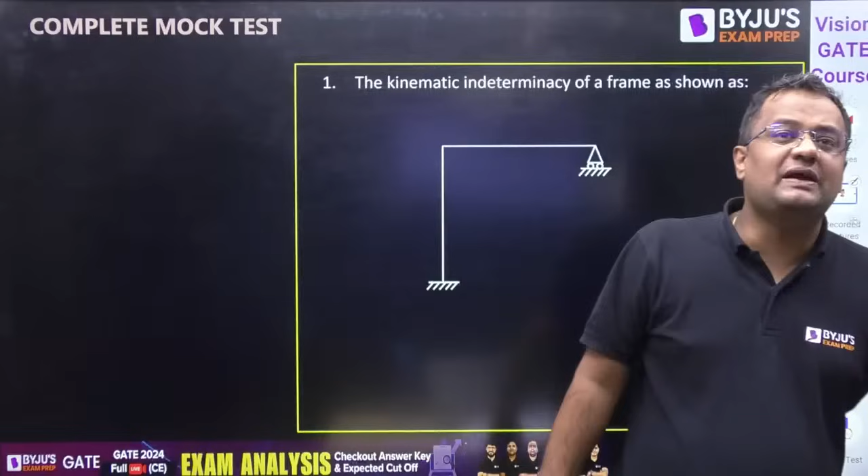Okay come on, we are moving. And guys, for MSQ questions there is no negative marking. For MSQ questions there is no negative marking. MSQ and NAT both have no negative marking.

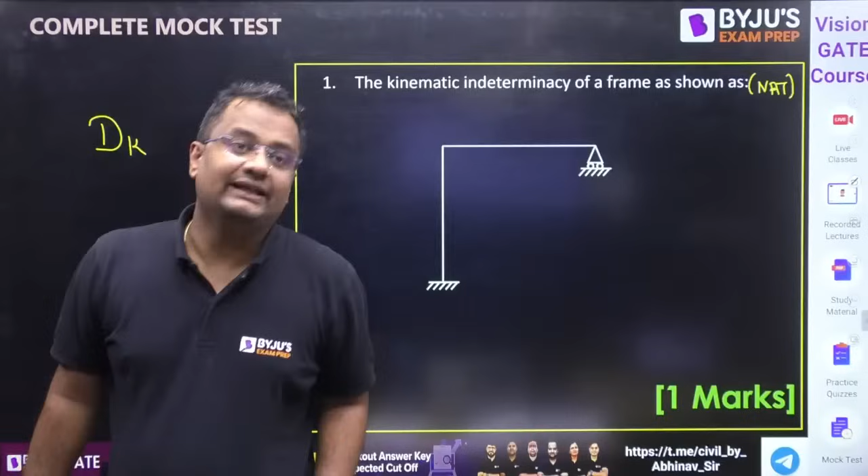NAT means that when you are evaluating yourself in the GATE examination, it will be written whether the question is MCQ, MSQ or NAT. It will be written there, guys. So, what is the degree of kinematic indeterminacy?

Good morning Sagata, everyone. The degree of kinematic indeterminacy is 3J minus M minus R. What is the number of joints? 1, 2, 3. Number of members, guys. Number of reactions: 1 and 2, 1 vertical 1 horizontal, reaction 3 and 1. Total 4 reactions.

So what value are we getting? 3J is 9 minus 6, it will be 3. So for this NAT type problem you have to fill in 3. And what are those 3? If you want to visualize it, why are you writing 2, guys?

If you want to visualize it, when the load will be there, let it be point B, let it be C. What are those 3? One is this movement theta B. When this C will be going here - small deformation, not rigid body displacement - and this is theta C. These 3 are the things that will be changing. Yes or no, guys?

Come on, tell me quickly. Okay, question number 1, guys, please evaluate yourself. Question number 2, again of 1 mark.

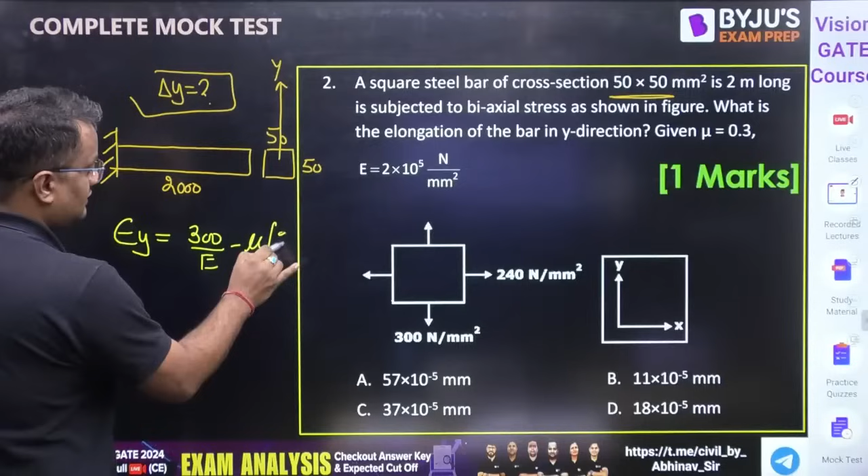What is the elongation of the bar in the Y direction? What is strain Y? Strain in Y is sigma Y by E, that is 300 by E, minus mu times sigma X by E, that is 240 by E. Now E value and mu value are given, so strain in Y can be found since E and mu are known. Strain Y equals delta Y by Y, and Y is 50. From here you can get the value of delta Y.

Are you getting this answer A? If yes, please do +1 marks, evaluate yourself as plus 1 marks, otherwise minus 1 by 3, because this is MCQ, so of course negative marking will also be there.

Come on, Mayank from Madhya Pradesh. Question number 3. Please bring the calculator, copy and rough pen with you if you want to take the real feel of this paper.

Let there be a rod placed between two metal plates. The metal plates are fixed supports. The rod is fixed to one plate, and the distance between the rod and the other plate is 0.1 mm.

The temperature of the rod is increased by 120 degrees Celsius. The length of the rod is 300 mm. Young's modulus E is given and alpha is also given. Calculate the axial stress produced in the rod.

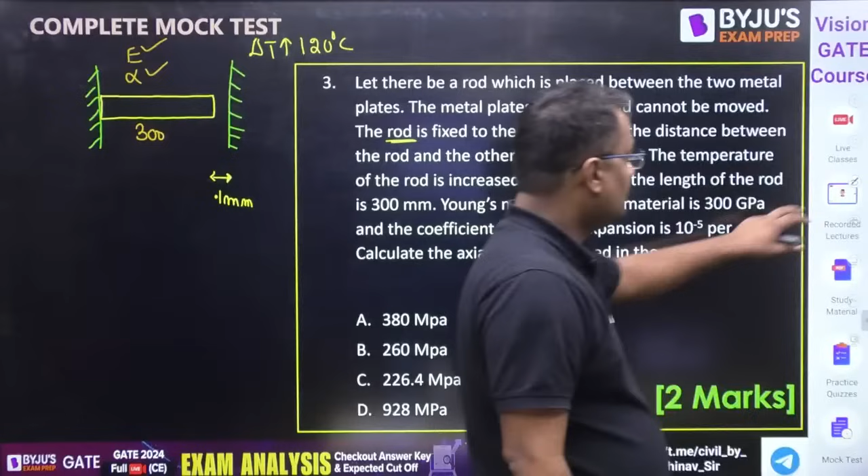First, let me check what will be the free expansion if these supports are not there. Free expansion is equal to L alpha delta T. L is 300 mm, alpha is 10 to the power minus 5, and delta T is 100 degrees. So 300 into that is 3 into 10 to the power 4, which gives 0.3.

So if it is free, with no restriction, it will elongate by 0.3 mm on both sides - I am just showing one side. But here it can elongate only 0.1 mm, so there will be stress.

If this value is 0.05 mm, tell me the answer on the comment box - what will be the stress? It wants to expand 0.05 and there is a gap of 0.1, so it can easily expand 0.05. So there will be no stress in that case.

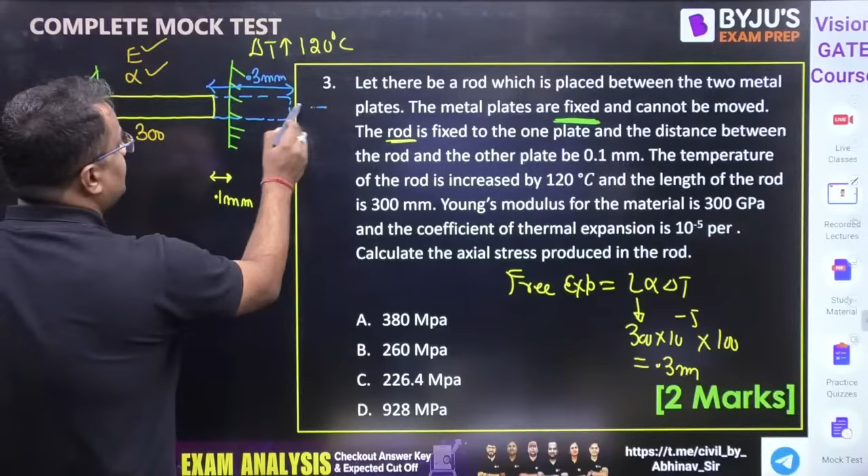So here stress will be coming. This internal force P will be pushing it back by how much? 0.3 minus 0.1, so this is 0.2. So P is pushing it back, PL by AE is equal to 0.2, so from here P by A is the stress. L value is given, E value is given, you can find the value of stress.

Or this is one method. Second method: stress by strain prevented, in case of thermal stress, is Young's modulus. So what is strain prevented? Strain prevented is 0.2 upon length, that is 300. So from here also you can find stress.

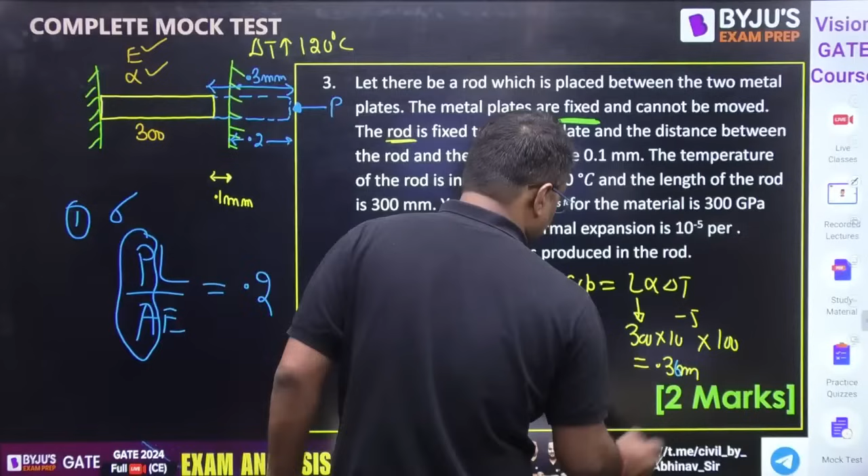Free expansion is coming how much? T is 120. So 1.2 into 0.3 gives 0.36. So this is 0.36 minus 0.1, which is 0.26.

So how much answer are you getting, guys? Come on. Option B - everyone got it? Evaluate yourself, I will be asking your marks also.

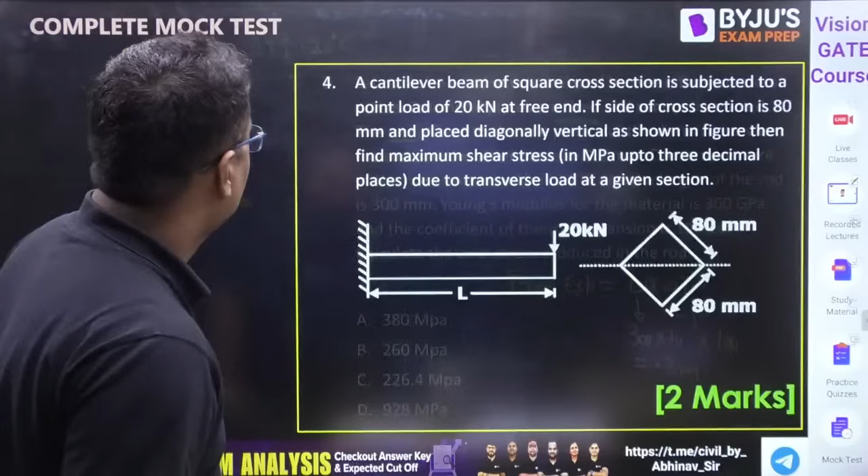Question number 4, guys. A cantilever beam of square section is subjected to a point load of 20 kilonewton at the free end. Here the load is 20 kilonewton. If the side of the cross section is 80 mm, it is placed tilted like this.

Then the maximum shear stress is asked. This is a 2-mark NAT type question, therefore no negative marking.

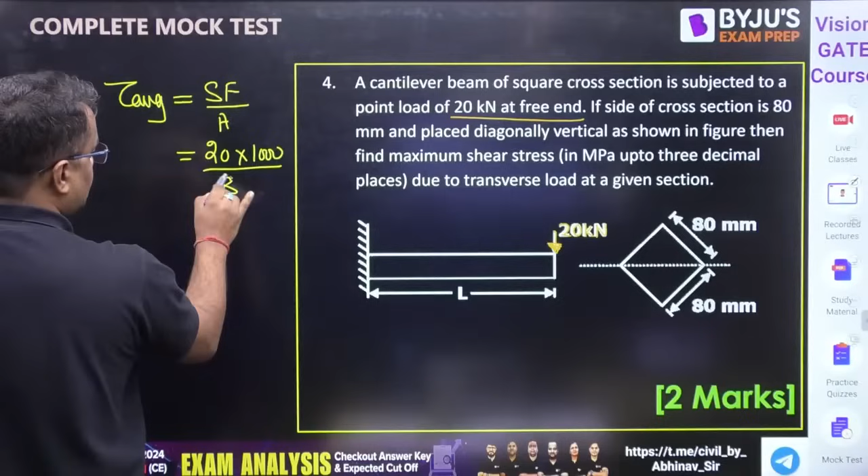Guys, what is tau average? Tau average is shear force by area. So Newton per mm square is megapascal only. Let me convert it to Newton per mm square, which is also megapascal.

And for this kind of diamond section, what is tau max? If total this is h, tau max is 9 by 8 of tau average, or also 1.125, since 9 by 8 is 1.125, acting at 3h by 8 from here. So what is 9 by 8 of tau average?

So this is coming to be 3.125. Tau maximum in diamond section is 9 by 8, or you can say 1.125 of tau average. So it will be 3.515 megapascal.

This is the answer, guys. This is the answer. Question number 4. Yes, Deepak, Saurabh, all champions are here, guys. Come on, everyone.

Question number 5, guys. This is also shaded, beautiful question, guys. This is the question for the rankers, everyone.

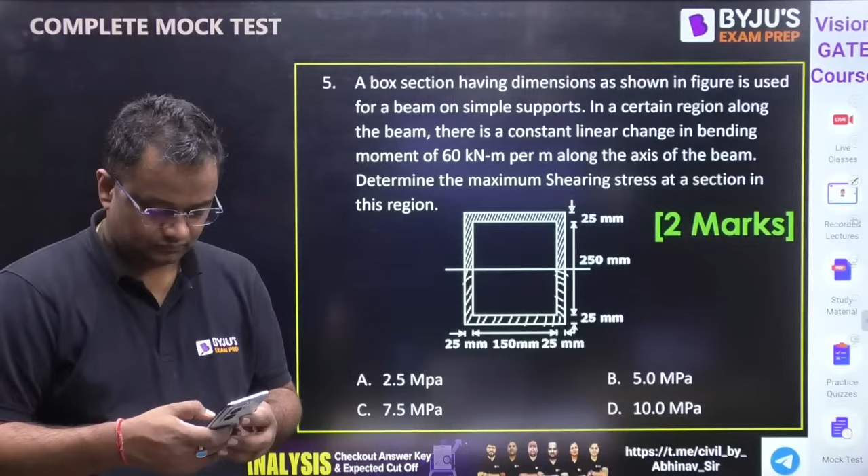Chalo. This is the question for the rankers, guys. Let me see who can do this, guys.

What is this box cross section having dimension as shown in the figure? In a certain region along the beam, there is a constant linear change in the bending moment of 60 kilonewton meter per meter. Okay, what is shear force, guys?

Shear force is dm by dx. So what is the change in bending moment? 60 kilonewton in 1 meter. So it is 60 kilonewton shear force.

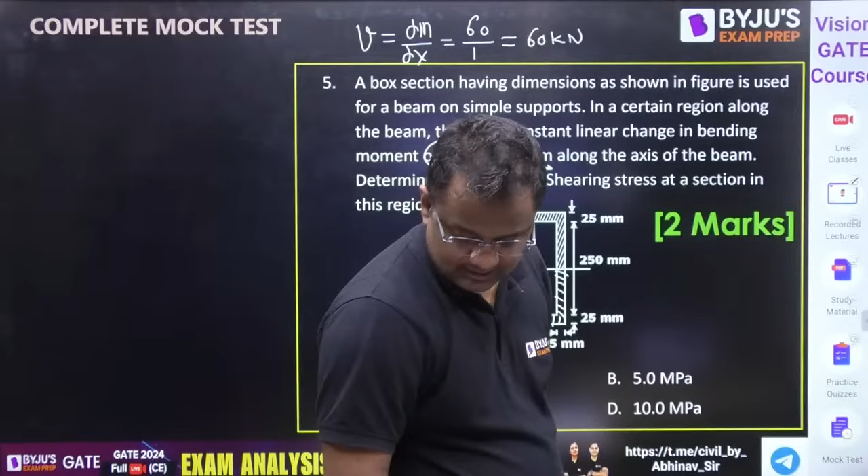Determine the maximum shear stress, guys. Excellent question. Excellent, guys. Everyone.

Chalo. Let me see who can do this, guys. This is the real question for the ranker student, guys. This is the real question for the rankers.

Guys, tau max will be at neutral axis for symmetric sections. Okay, tau max will be at neutral axis. Correct? Now we have to calculate.

This is not a rectangular section, guys. We cannot do 3 by 2. This is not a rectangular section. This is inside, it is hollow. And for symmetric sections, guys, either circular or rectangular, tau max is at neutral axis.

Now the tau maximum is equal to tau at neutral axis, which is equal to S into AY bar by I into B. Correct? Beautiful question, guys. Excellent question. Now what will be I?

What will be I? Now first of all I consider this whole is the area. Material is same, guys, BD cube by 12. So 150 and 25 and 25 is 200. 250, 25 and 25 is 300 cube by 12 minus.

Actually this is not the area. So what is B of this? 150 and 250. So 150 into 250 cube by 12.

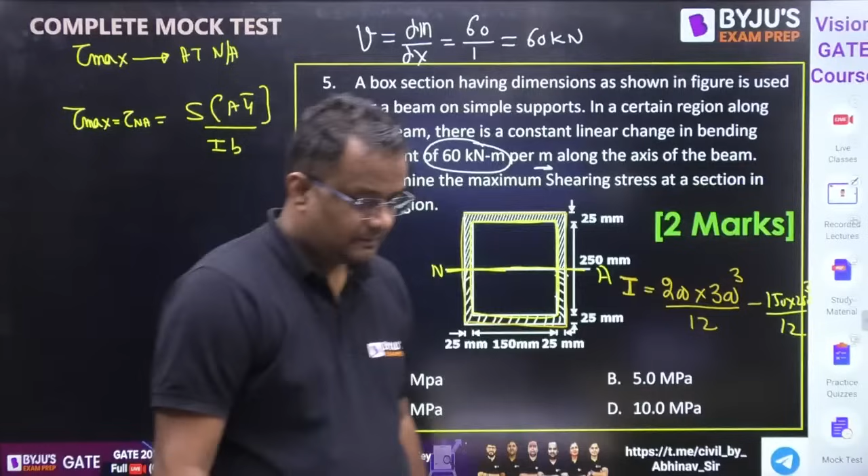Correct? So I about neutral axis from here, how much you are getting, guys? 25.46 into 10 to the power minus 5, in meter, not millimeter.

Meter to the power 4. Any doubt in this? Yes, 25.46. Good, Vishnu. Vishnu comments a lot, you know. Good, Vishnu. Did you like yesterday's session?

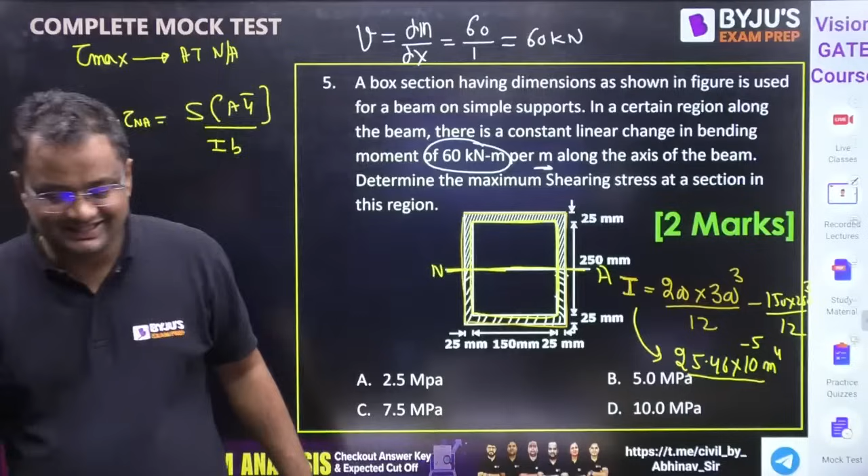Okay, now I is known. This I is known. What is the width? What is B? I is known, na.

What is the width? Width is the section where we are finding the neutral axis, where we are finding the stress. So what is the width, guys? 25 and 25, so it is 50. Width is the section where we are finding the stress.

What is S? S is this, 60. S is 60 kilonewton, guys. Okay, so S is known, I is known, B is known.

Now I'm going to AY bar. So A is the area of the section and Y bar is the center of mass of that. So let me consider above this, guys, either this is the red area, or this blue area.

Now for red area, guys, AY bar, what is area of that? Red area is 150, 25, 25. It is 200 into 25 is the area.

And what is the Y bar from here? 125 plus 12.5. This is 125 and 12.5. This is 137.5.

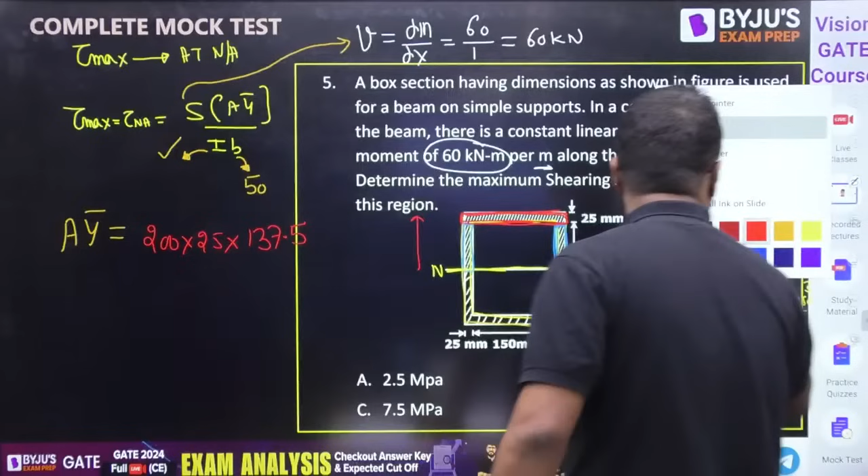Okay, this is for red. Now blue is also there. So what is this blue area? This is 25 and what is this length? 25 into 125, and there are two such, na? This and this. Correct.

Chalo. And what is the center of mass of this? 125 by 2. Center of mass is 125 by 2. So this is AY bar.

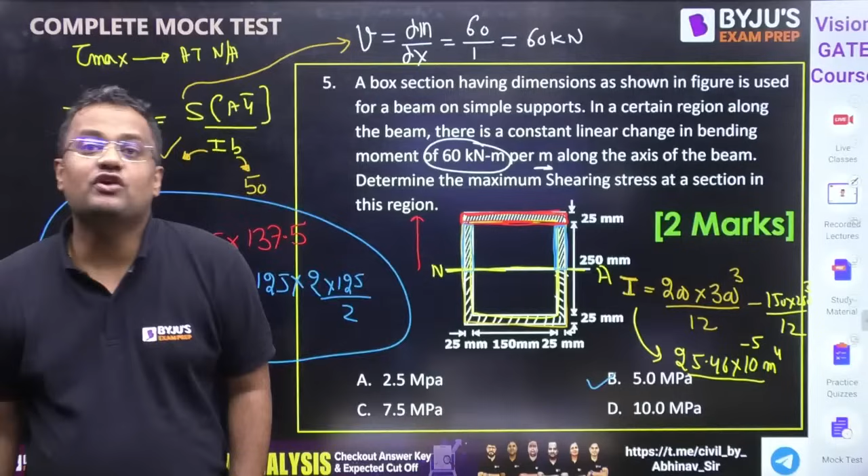Now if you put it, guys, you will be getting the answer, please check B. Have you understood, guys? This is the real question for the real students, guys. Have you understood?

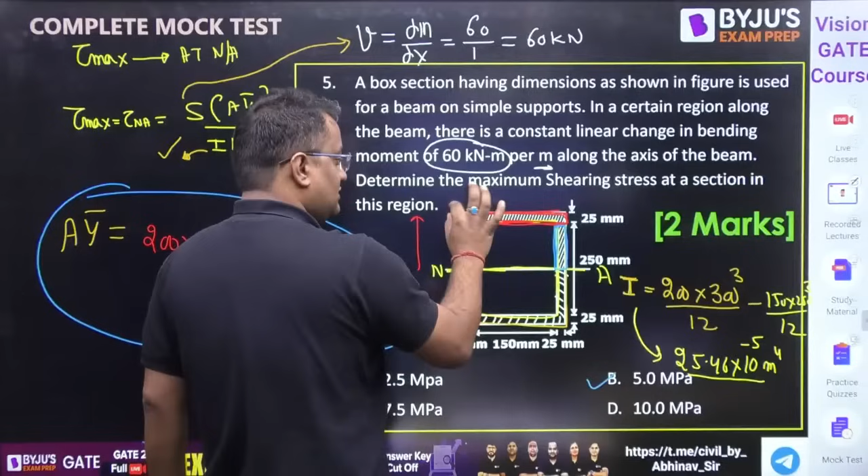For AY bar, above the area, I have separated the red area and the blue area. For the red area, I find AY bar. For the blue area, I find AY bar. This is the real question, guys.

2-mark question, question number 6. Chalo.

The rigid portal frame in the figure will not have a side sway if, okay guys, it is a symmetric section and symmetric loading - symmetric figure and symmetric loading, then there is no sway.

So guys, it will not have sway if I1 is equal to I3. If I1 is equal to I3, then it is a symmetric structure and the loading is also symmetrical. C option, okay guys.

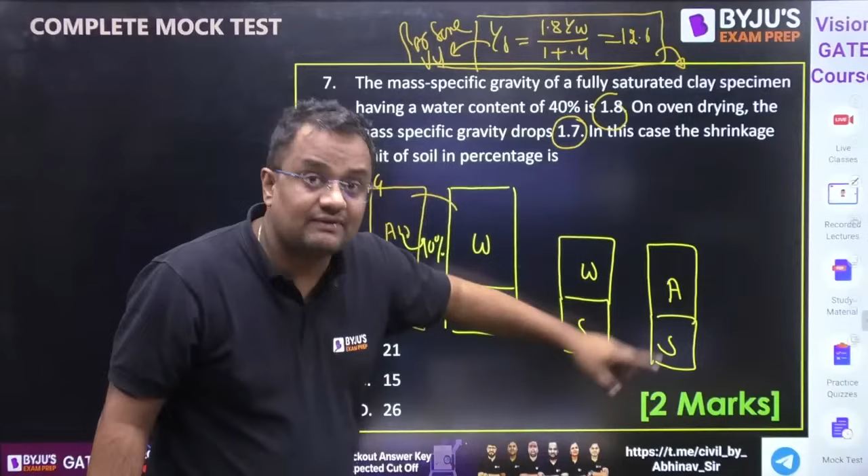The dry density corresponding to this state using this formula for same volume is 12 - 12 means density, it is around 1.2 specific gravity. But our specific gravity is 1.7, that means our specific gravity is increasing, which means volume is decreasing. Have you understood what I want to say?

Have you understood what I want to say? Okay, therefore I know it is decreasing.

Now if I apply here SE equals WG. So what is S here? S is 1, E I don't know. W is 0.4 into G. So E is equal to 0.4G. Yes or no? Now E is equal to 0.4G and the formula is gamma equals G plus SE over 1 plus E into gamma W.

What is gamma here? 1.8 times gamma W. That I am writing for this case. G plus SE, S is 1, over 1 plus E into gamma W. So guys, one equation is this between G and E, and one equation is this. From 1 and 2, you can find out the value of E and G.

So that G value you will be getting as 2.65. Please confirm, everybody, the G value is coming same.

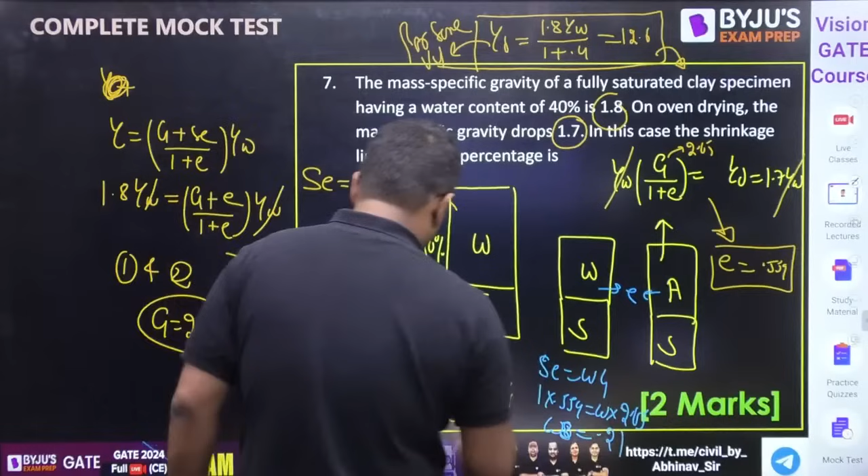Saturation is 1, E is 0.559, W into G, G is also same 2.65. So from here, guys, the W value you are getting is 0.2108, 21%. Beautiful question, guys. Beautiful question.

Have you understood? Any doubt, guys? Any doubt you can ask me. No doubt?

Okay, now this question, guys. What is the shrinkage ratio? 1 mark question. Shrinkage ratio is volume at liquid limit, volume at shrinkage limit upon volume at shrinkage, like this. What is the value coming? Guys, please check, if you put all these values that are given, you will be getting 1.9.

No, Akhil. If anybody has applied for 2 and he writes only 1 paper, it's okay. It's absolutely fine, guys. No issues in that.

Okay, 9. Do the question. Question number 9, hit it, guys. Okay, guys, how much is the gravel percentage?

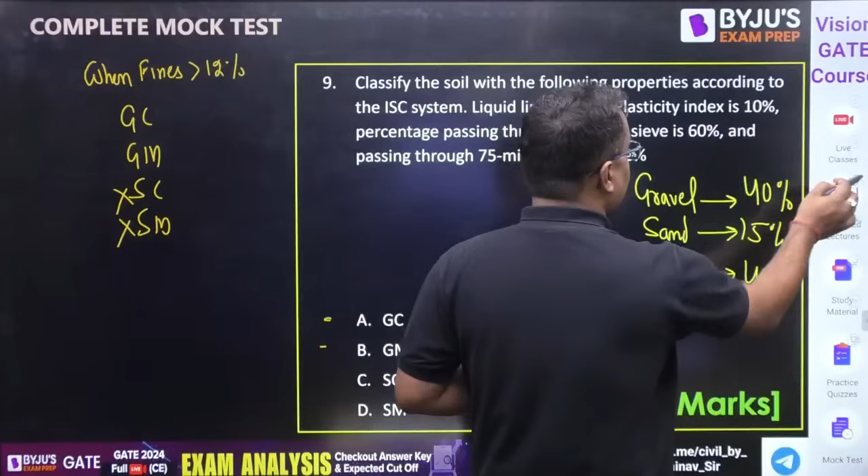Okay, now it is the case when fines, that is fine grain soil, is greater than 12%. So here the names are GC, GM, SC, SM: clayey gravel, silty gravel, clay sand, silty sand. So of course sand is less, so these will not be the answer. So either it will be GC or it will be GM. 2 options are deleted.

Now it is silt, clay or silt. So guys, we have the A-line equation, 0.73, liquid limit is 40 minus 20. So IP value is 14.6. Our IP is WL minus WP, 40 minus 10 is 30. So that means on the A-line, the point is here 14.6.

But our IP is more. So our IP is more, it is what? Okay sorry, that is not plastic limit. Our IP is 10. Not this, that is not plasticity, plastic limit, that is plasticity index, that is 10. So our IP is less.

So it is less, means GM. So guys, less IP because silt is having less plasticity, so it is M. Why above point is clay? Why above point is clay? I told you many times. Above point is clay because clay has more plasticity, IP value of this is more.

Okay, so now next, guys, hit it. What is GI value? Group index, if you don't know, it is empirical: 0.2A plus 0.005AC plus 0.01BD. And what we do from group index? If the group index value comes 0 to 1, then the soil is classified.

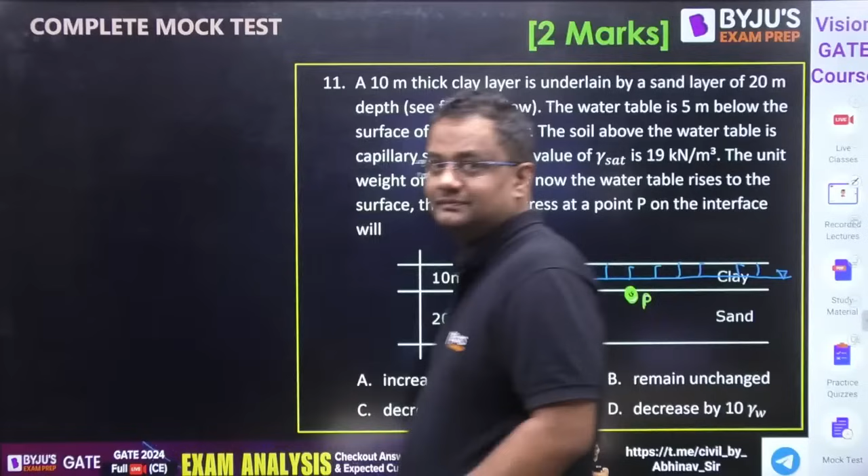Guys, it will not be changed here. Sigma bar is sigma minus u. Earlier also, as it is capillary saturated, sigma here will be gamma sat into 10 in both cases. If the water table is here or the water table is here, of course it is saturated. And when the water table is here, then also this region is saturated because it is capillary.

So sigma is same in both cases. But u in the first case is gamma W into 5, and in second case, u is gamma W into 10. So in second case we are subtracting a larger value, so it is decreased by gamma W into 5.

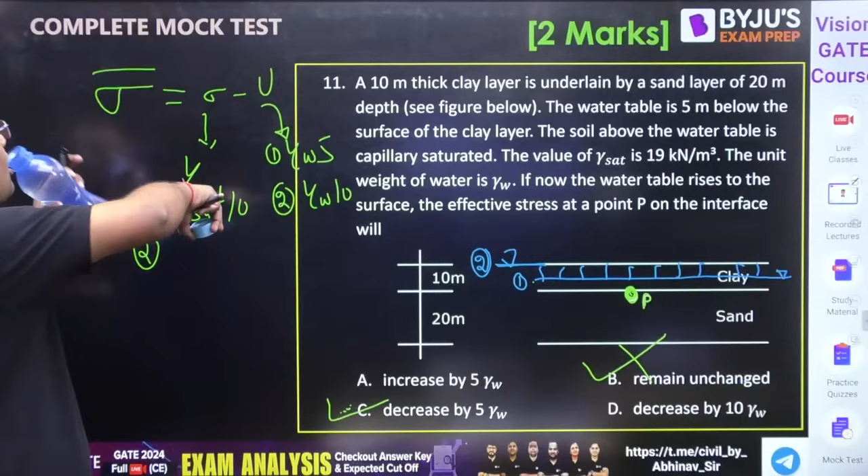So it is not this option, it is option C. Everyone has written C, all are more intelligent than me. Got it, guys? In both cases, sigma is same, gamma sat into 10, but u is different.

Okay, do this 12th question. In a drained triaxial test, a saturated sample of cohesionless sand, C equals 0, fails under sigma 3 equals 1.5 and sigma 1 equals sigma 3 plus sigma D. The inclination of the failure plane from the horizontal is given by the major plane formula, 45 plus phi by 2. So sigma 1 equals sigma 3 into (1 plus sine phi)/(1 minus sine phi) plus 0. Sigma 1 and sigma 3 are known.

So from here the phi value you are getting is 39.5, please check. And 45 plus phi by 2 will be 64. Got it, everyone? Yes or no?

Okay, 13th question.

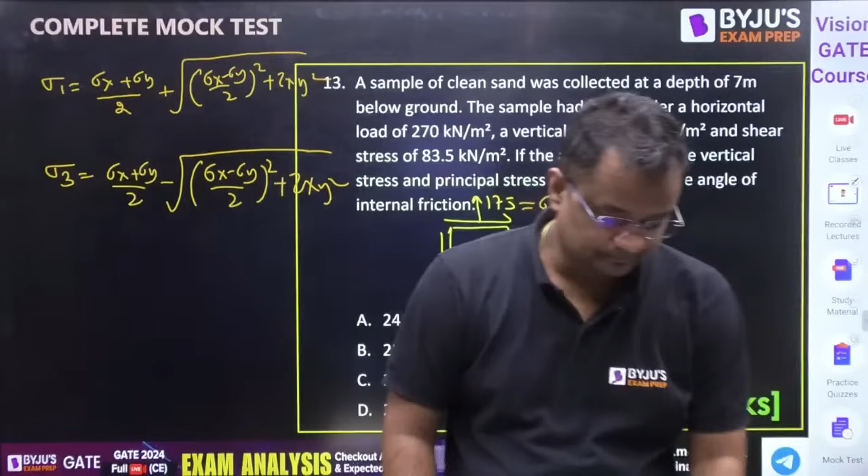Now this is sigma x, this is sigma y, this is tau xy. Tell me the value of sigma 1 and sigma 3.

And as it is sand, so the failure envelope will start from here. What is this value? This value is sigma 1. This value is sigma 3. Center will be sigma 1 plus sigma 3 by 2.

No increase. Why no increase? Tell me.

Earlier here the water is gamma W into 5, and now it is gamma W into 10. Why, Shubham? So now the water table rises, na? So it will decrease.

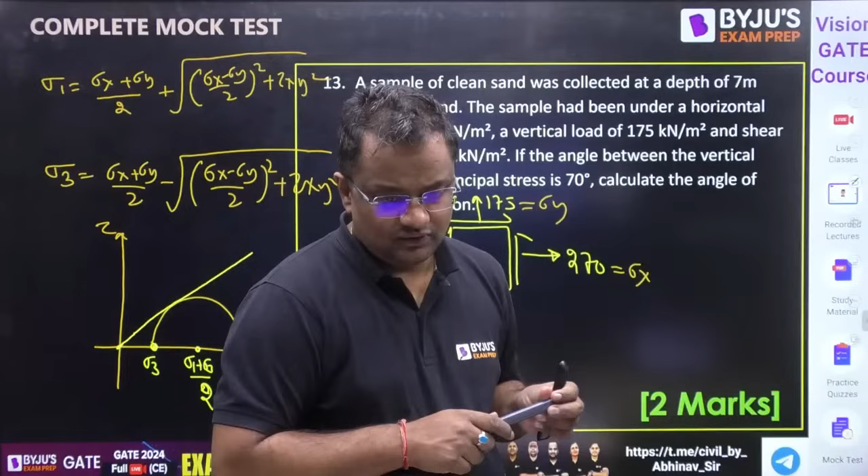318. Yes, and this is 126.43. This is 318 point something. 318.56, and this is 126.43.

This is 5. Now sine phi is this perpendicular, that is radius, upon hypotenuse, that is this. Tell me the value of phi from here.

Everyone, tell me the value of phi.

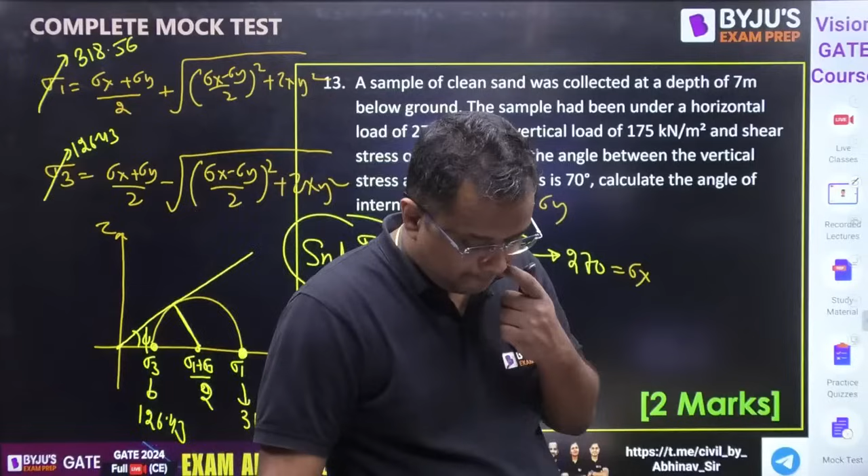Guys, please check. Are you getting 25.59? 0.431 is the sine phi value. Phi value we are asking, na. Okay, calculate from here. Guys, how much you are getting?

Till now, 9 of SOM and structure and 10 of this. Okay, out of 19 marks, how much you are scoring till now, guys? Tell me.

How many questions we done? 13. How much? For diya? 12. Others? 8, 11, 12.

Chalo. Let us do now surveying.

Excellent question, guys. What is the parallactic angle for analytic lens? Excellent question, NAT type problem. Excellent question, guys. Nothing data is given. Can you find what is parallactic angle?

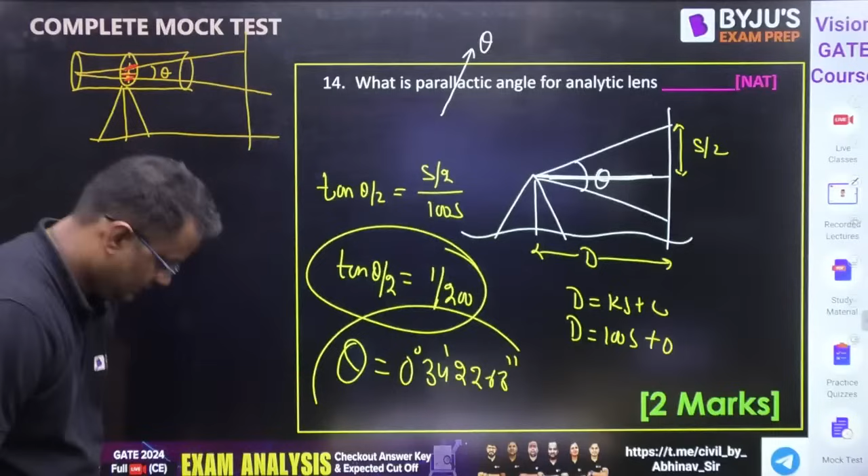So tan theta by 2 is equal to 1 by 200. From here it is 0 degree, 34 minute, 22.63 seconds. In NAT type problem, they will be converting into degrees and asking you answers there. Understood? Okay, 15.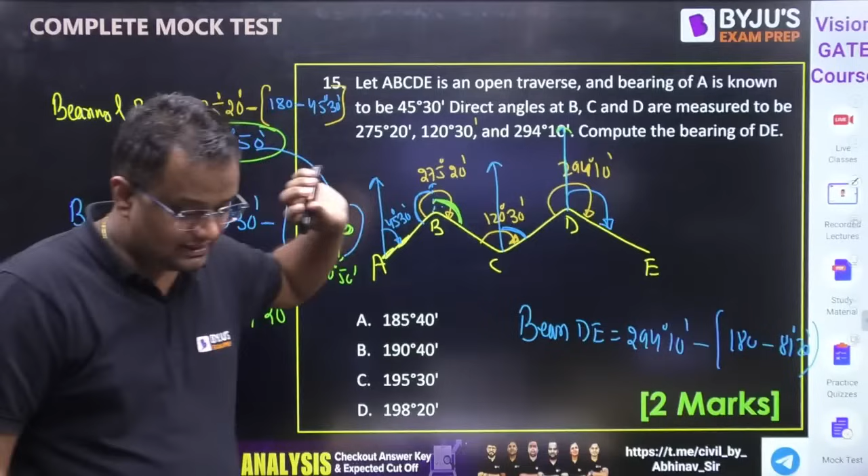Because the concept I am applying here is that if this is angle X and this angle is Y, the sum of X plus Y is 180, by the parallel line concept. So finally the answer is coming to be 195 degree 30 minutes.

Everybody in the comment section, give me yes or no. Tell me, understood this challenging question, guys? Yes or no?

Now do this 1 mark question. When the bearing of a line was measured with the compass, it came to be this much, and if the declination is this, what will be the true bearing of the line?

Guys, one thing is, I told you: convert into whole circle bearing, do plus and minus, get the answer in whole circle bearing, and then convert the final answer into quadrantal bearing. This is the Ghisa-Pita concept that we do every time. Convert this into whole circle bearing, from the declination do plus minus according to east and west, get the answer in whole circle bearing, and again convert into quadrantal bearing.

Now I am telling you the Mentos Jindagi shortcut. Nobody will tell you this. Everybody is doing that old method also. We have also done this, but I told both the methods. Now I am telling here the shortcut.

Guys, from the magnetic north, this is the shortcut, nobody will tell you this. This is magnetic south, this is magnetic east, and this is magnetic west. Now here, the angle of a line is coming as 42 degree 15 minutes from north to west.

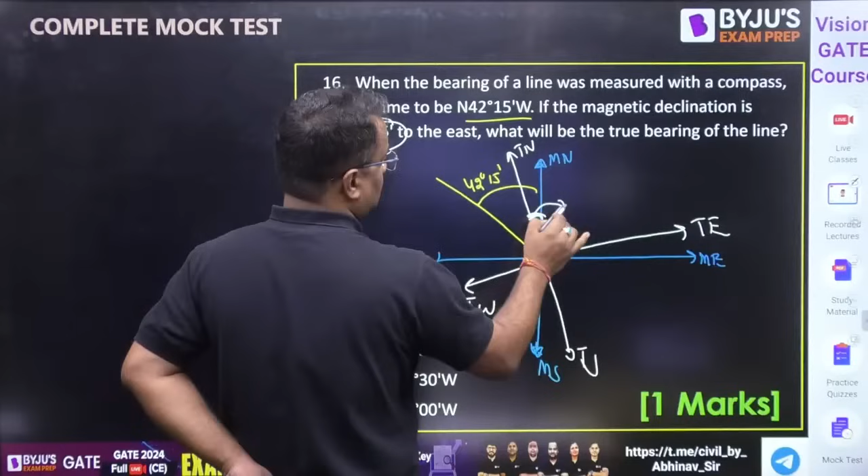Now declination is 4 degree 45 minutes toward the east. That means from true north, so this will be true south, this will be true east, this will be true west. So this declination angle is towards the east, the true magnetic north from here is 4 degree 45 minutes east.

So what is the true bearing? True bearing is this angle now, this angle is the true bearing. So this will be yellow minus white. So 42 minus 4 is 38.

Okay, 42 minus 4 is 38. And 15 minus 45 is minus 30. So 38, 37, 30, so N 37 degree 30 minutes.

Yes or no, guys? No, no, no, it will be C, guys. Have you understood? Give me yes or no. Tell me please, everyone.

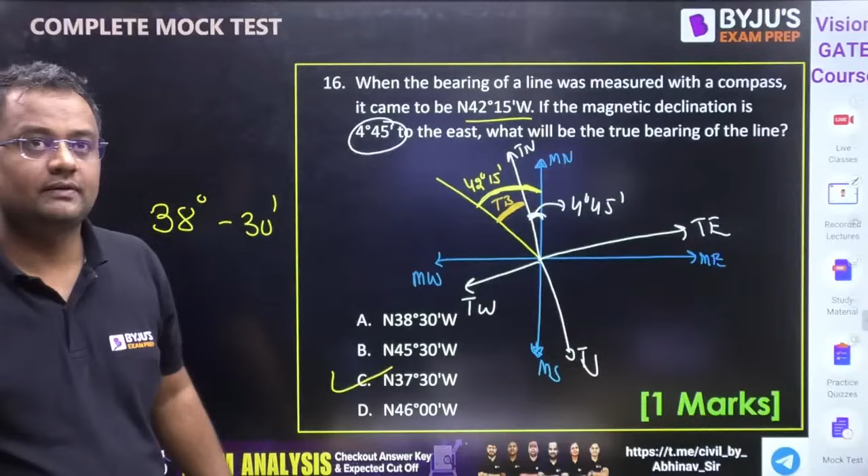Now the 17th question. A point A has a coordinate with east, west, north, south directions. A has a coordinate of 500 north and 600 east, correct?

If the bearing of line AB is 36 degree 20 minutes, and the length of AB is 483.25 meters, what is the independent coordinate of B?

Simple, your class 11th concept. What is the north of B? North of A is 500, so go from here this much above. This is latitude, or forget latitude, come to 11th class: 483.25 cos 36 degree 20 minutes.

And east of B: either you do survey, so 600 plus departure, 483.25 sin 36 degree 20 minutes, or 11th class also. This is 600 east, and then this angle sum.

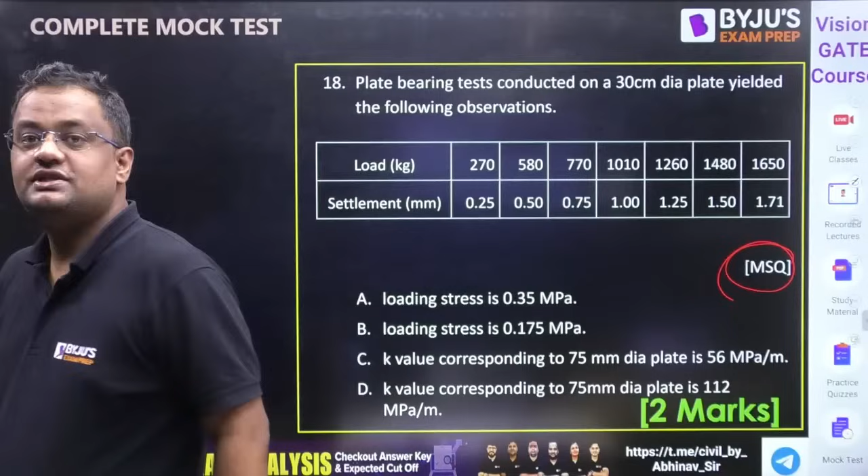It's tougher than the last one. Okay, so guys, whatever the toughness is, on the exam day you should find it lighter. Whatever you are finding here, in exam day you should be feeling a lighter paper. The more you sweat in practice, the less you bleed in the war.

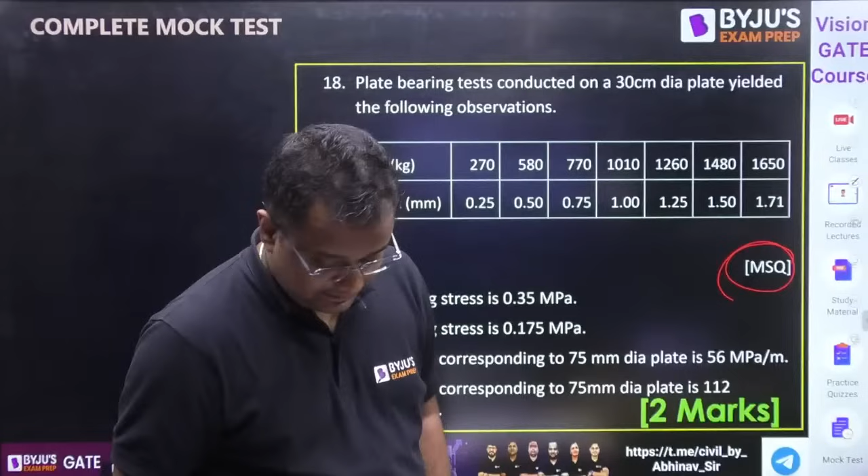Come on everyone, every commando, please let me know. This is question number 18, guys. Hit the question hard.

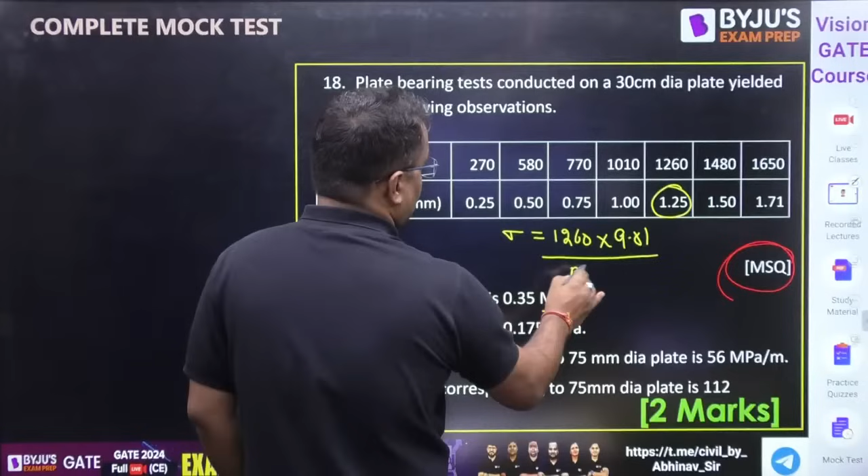So what is force by area? 0.175. Please calculate.

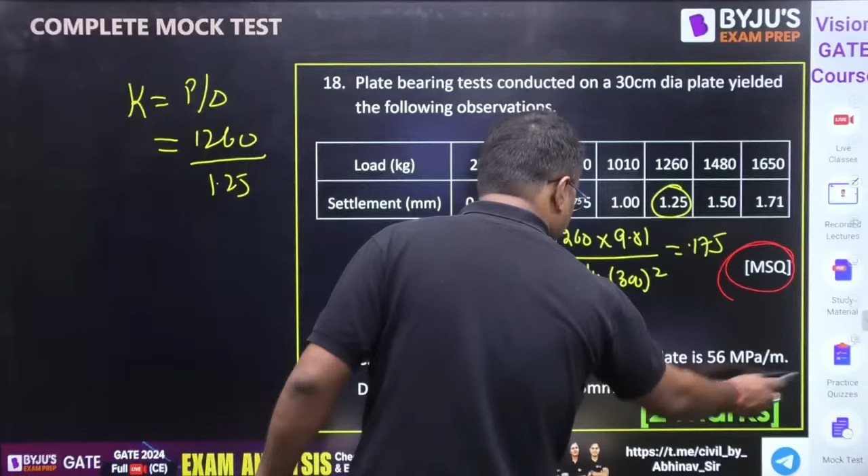Now K value is P by delta, that is 1260 upon 1.25 mm, and if it is per meter, multiply by 10 to the power minus 3 because this is mm. So how much is this K value coming, guys? K is 140.

This K value corresponds to standard diameter of plate, that is 140 megapascal per meter like this. But now K75 by K30 is equal to 30 by 75, and we have to find out corresponding to 75. This is the standard, guys. K75 by K30 is equal to 30 by 75.

30 by 75, how much is it coming? Please check, 0.4 it is coming. So this is K30, so K75 is 0.4 times of 140. Have you studied the plate load test? So B and C is the correct answer.

Any doubt? No. Now this one.

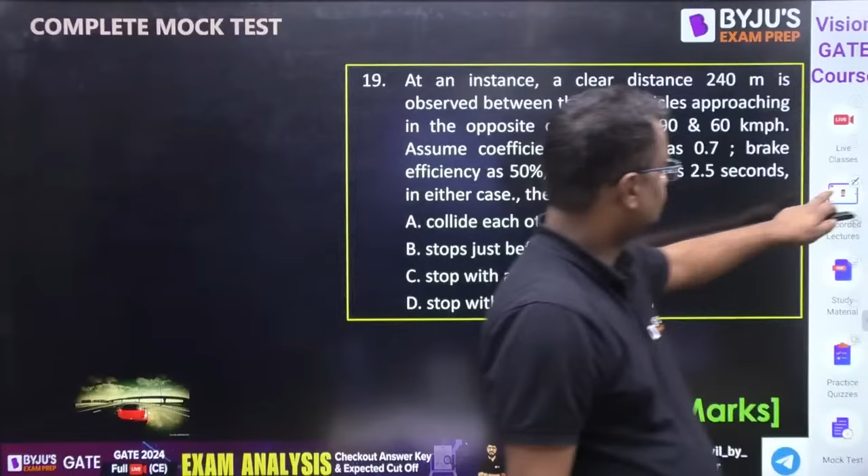A clear distance of 240 meters is observed between two vehicles. One is at 90 speed and one is at 60 speed. Mu is 0.7, brake efficiency is 50%, reaction time is 2.5, and what will be the case?

So it will stop in SSD1, it will stop in SSD2. Now SSD is equal to VT plus V square by 2G into mu into braking efficiency also, so we have to multiply by 0.5. Every value is given, reaction time is 2.5. Now what is SSD1 and SSD2?

Please check from here, guys. Are you getting 153.4? Please confirm. And SSD2 you are getting is 82.14. Please confirm by this value, but multiply by 0.5 here. So 153 plus 82 is how much? 235.6 something.

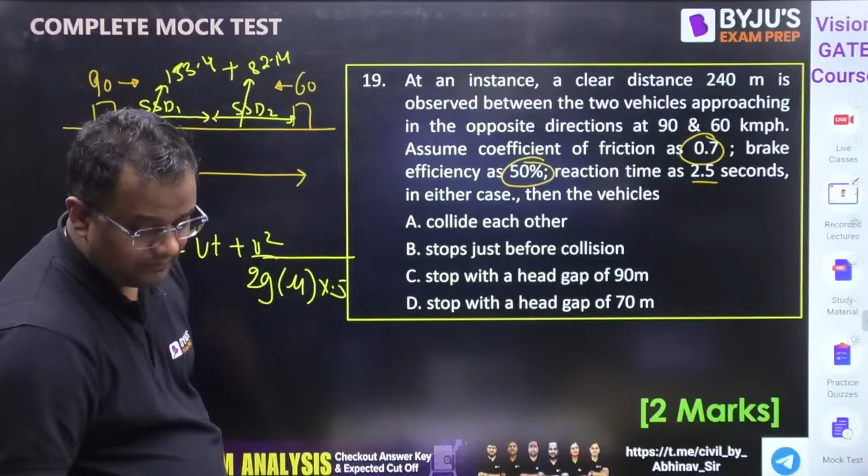And the distance between them is less than 240, so they will not collide. They stop before collision, not with the gap of 90 and 70. A gap of only how much? 240 minus 235, a gap of only around 4.5 meters.

Not 90, Mayank. The gap is only this much, they will just kiss each other. Not even kissing will happen - kiss will be when SSD1 plus SSD2 is equal to 240, exact 240. Then they will not collide but just kiss. So here it is not a kiss, there's a gap of 4.5 meters remaining.

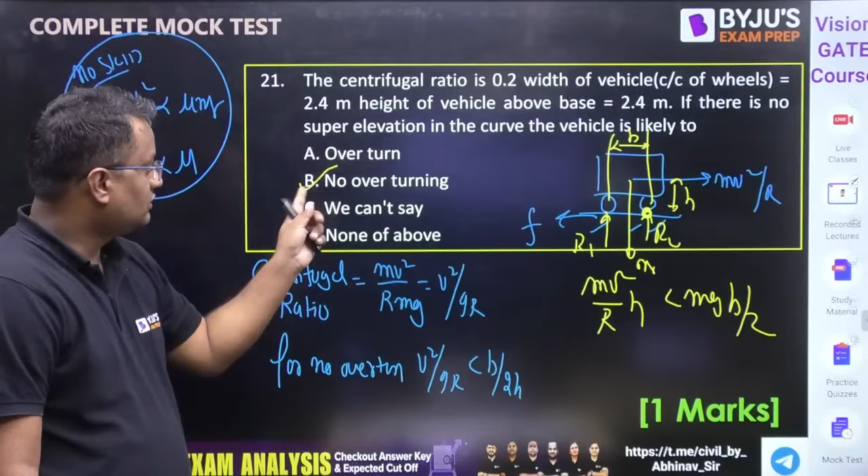Every value is given. So guys, from here, this V square by GR value is coming less than B by 2H, so it is no overturning. The calculated value of V square by GR is less than B by 2H, so it is no overturning. Got it?

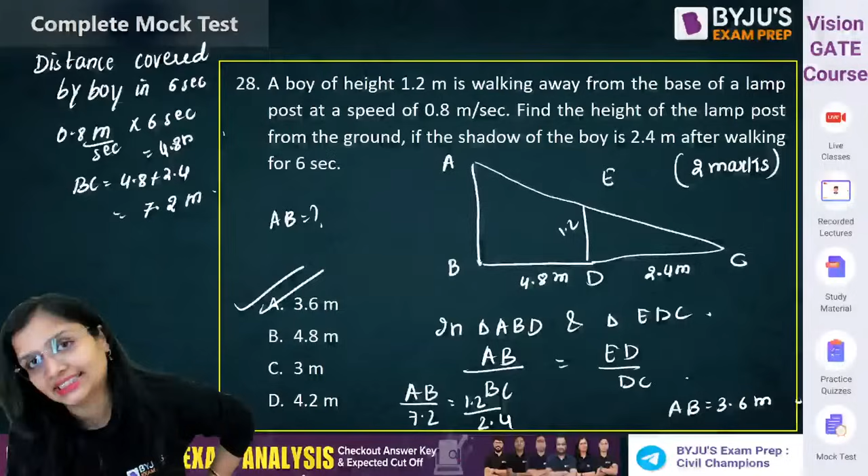Clear? So this is again a 2 marks question. If you got this correct, give yourself 2 marks, and if wrong, minus 0.66. Next question, now you will answer this, 1 mark question, very simple. Quick, quick, quick, I'm waiting, then I'll answer.

Kindly write the question number if possible, please. Quick, that's very simple, how much time you guys are taking, I don't know why.

Very good, very good, Prathmesh answered it correctly. Very good, very good, Shivam. Very good, correct, Sai Bali Mishra, correct.

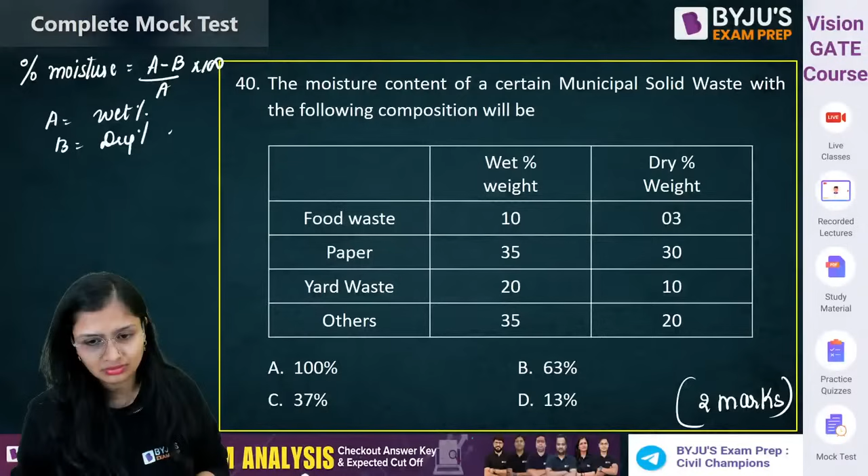So if you add 10 plus 35 plus 20 plus 35, how much will you get? 100. If you do 3 plus 30 plus 10 plus 20, how much will you get? 63. So technically it should be 1 mark, but still I gave it for 2 marks. 37%. Or you could have done it like this also: 10 minus 3 is 7, 35 minus 30 is 5, 20 minus 10 is 10, 35 minus 20 is 15. So if you add this also, you will get 37 only. Check it out, 20, 30, 37. So if you do it like this also, then also, or if you do it like this also, then also, both will give you the same answer.

If it is correct, give yourself 2 marks. Okay, now this is again a 2 marks MSQ question. Come on, answer. In this question you have to check total hardness, carbonate hardness, non-carbonate hardness. That's it.

Total hardness in water is due to the presence of multivalent cations, those with valency more than 1, like calcium, magnesium, aluminium. Total hardness in mg per liter is given weight upon equivalent weight. Equivalent weight of calcium is 20, given concentration 60 mg per liter. Equivalent weight of magnesium is 12, concentration 72. For aluminium, equivalent weight is 9. 1 gram equivalent of anything equals 1 gram equivalent of any other thing.

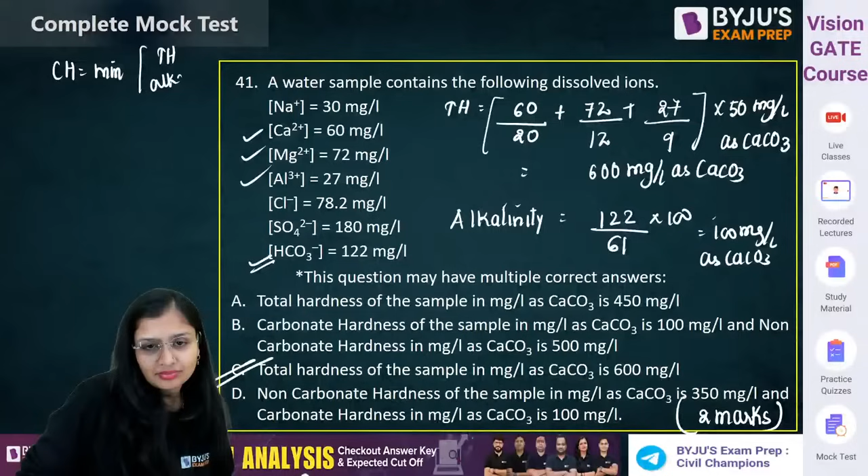Now talking about carbonate hardness and non-carbonate hardness. For carbonate hardness, it will be minimum of total hardness and alkalinity. Let's calculate alkalinity, which here is due to bicarbonate since carbonate and hydroxyl are not given. So 122 divided by equivalent weight, that is 61, into 100. How much does it come? 100 mg per liter as calcium carbonate. Carbonate hardness is minimum of total hardness and alkalinity.

So carbonate hardness will be 100 mg per liter. Now total hardness equals carbonate hardness plus non-carbonate hardness. So non-carbonate hardness will be 600 minus 100, that is 500. So non-carbonate hardness is this one. B will be the correct one. So B and C.

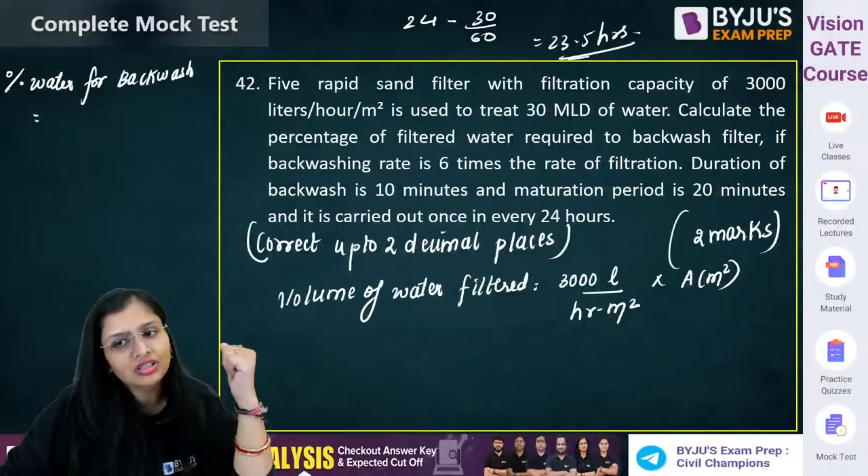Volume of water filtered, how much? 3000 liters per hour per meter square. For how much time is filtration taking place? Area you don't know, in meter square. You want volume. Out of 24 hours, 20 minutes is for maturation and 10 minutes is for backwashing, so out of 24, 30 minutes is gone. So 23.5 hours is for filtration. So multiply by 23.5 hours. That gives the volume of water which is filtered.

Now how much is the volume of water used for backwashing? Again this much only, but it is told that backwashing rate is 6 times the rate of filtration, so multiply by 6. Why? Because it is written in the question that backwashing rate is 6 times the rate of filtration.

Okay, area, and how much time does it take for backwashing? 10 minutes, converted into hours that's 10 by 60 hours. So you don't need to solve it separately, apply your brain: volume of water required for backwashing divided by total filtered water, multiply by 100 for percentage. 3000 will get cancelled, A and A will get cancelled, and you get 1 upon 23.5 into 100. That's it, so you don't need to solve it individually and waste your time.

Solve it, solve it fast.

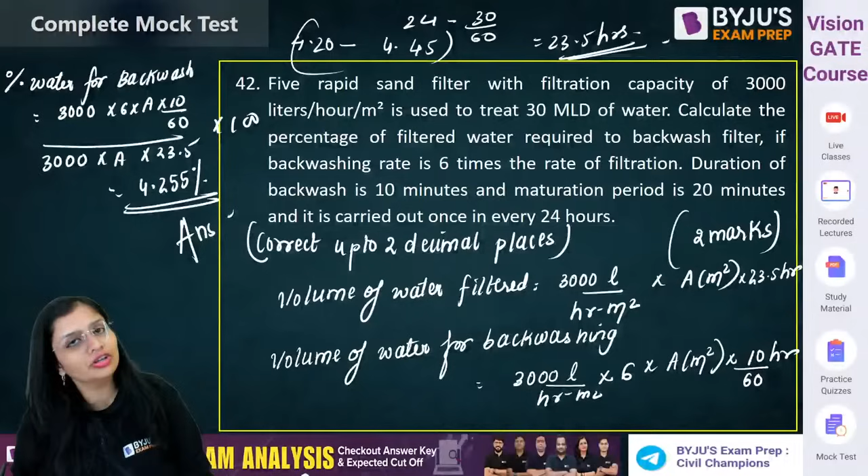So if you have an answer varying from 4.20 to 4.45, if your answer is in this range, you can allot yourself 2 marks. Correct.

Okay, this is a 1 mark MCQ question. 1 mark MCQ question.

Solve it, I'll bring water for myself by that time. Solve this question.

Which question are you saying? Okay, activated sludge process offers secondary treatment with minimum area, correct, and effluent of high quality.

High quality, what does that mean? Is one of the disadvantages? How can that be a disadvantage? Wrong. The advantage of activated sludge process is that they are easy to operate and do not require skilled supervision.

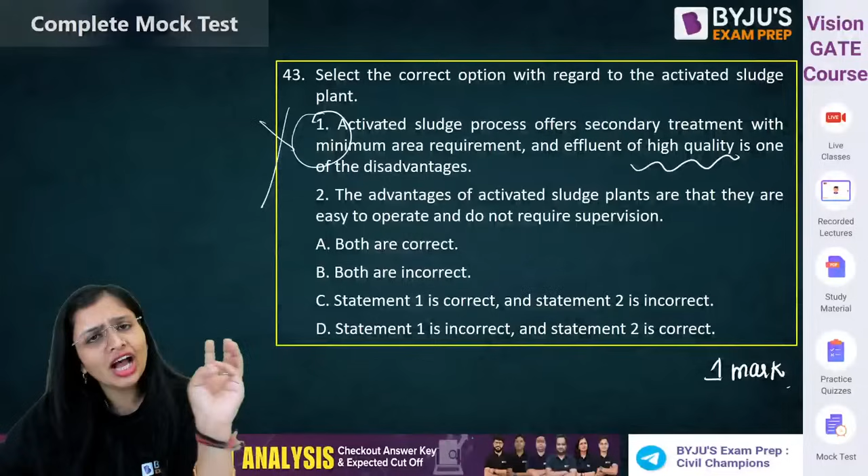Why would they not require skilled supervision? You have to control the food by microorganisms ratio because it inversely governs the efficiency. You need to control the supply of oxygen in the aeration tank. So it requires skilled supervision. It is not written as 'do not', so both are incorrect.

It requires skilled supervision, how can it not require it? Definitely it requires it, correct. And if nobody answered it correctly, 0.33 negative. Okay, this is a 1 mark question for open channel flow.

Come on, flow is subcritical if the width is reducing under no choke condition. What will happen if width is reducing? If here it is B1, here it is B2, kindly write the question number for which you are answering. Subcritical, that means above, this is Q max.

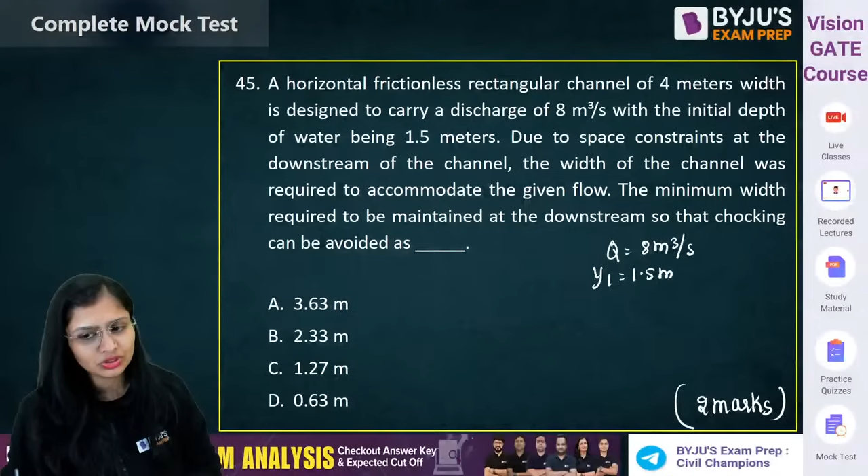A horizontal frictionless rectangular channel 4 meters wide is designed to carry a discharge of 8 meter cube per second. Initial depth is given to you as 1.5 meters. Now, because of the space constraint unavailability, the width on the downstream side is reduced.

It is asking you B minimum, so that choking can be avoided. I told you when I made this graph, when I was teaching you in the marathon also, E1 is equal to EC, and this is the concept you have to apply, E1 is equal to EC under no choking condition. Come on, solve it, everything is given to you in the question.

Come on. Y1 plus V1 square by 2G. V1 is not given to us directly. Y1 is 1.5, Q is 8 square, area is, width is 4, so 4 into 1.5 square.

Just check it out, if it is an NAT question, kindly take a moment and check whether acceleration due to gravity is given as 9.81 or not in the question. This is MCQ, so don't worry about it. 2 into 9.81, calculate how much E1 is coming.

1.591 meters is coming, check it out. Now, since it is a rectangular channel, you can take EC is equal to 3 by 2 YC. Can I do this? Okay.

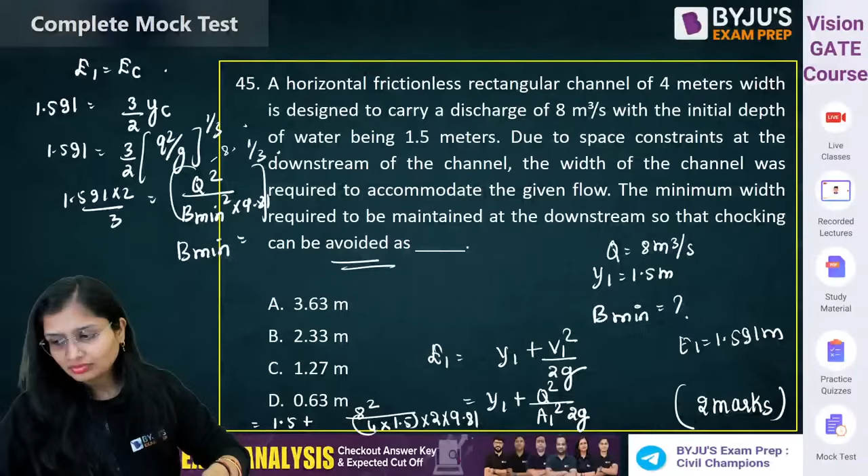How much is it coming? Solve it quickly. B minimum, solve it quickly. You will get 2.33 meter. Correct, very good, Abdul.

Okay, this is again a 2 marks question. Here with basic common sense you'll be able to solve the question. 2 marks.

After this, 2 questions of hydrology, 1 question of irrigation, and those are good questions too. So there's a good irrigation question there.

Come on, solve it. A rectangular channel of width 2 meter is provided with a hydraulic jump as an energy dissipator device downstream side. It dissipates energy equivalent to 2 meter of water. So energy loss is given to you as 2 meter. Assume that the energy dissipation taking place is due to hydraulic jump and there is no head loss. Froude number before the jump is 10.

What will be the sequent depth? That means the post-jump depth, that is Y2. You have to calculate. Come on guys, how will you calculate?

Incoming Froude number is given to you. How will you do it? Here you have to apply your brain. Easy breezy, just one equation and your answer will be solved. Not possible - how will you do it?

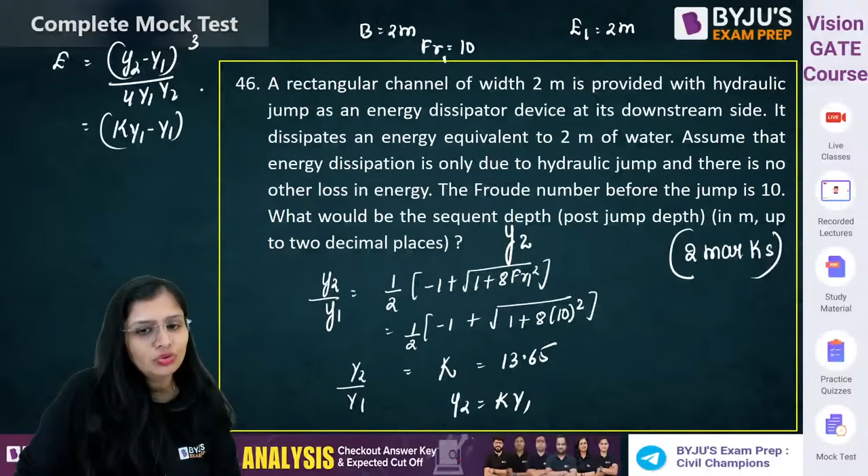13.65. I'll take it as K, so this is 13.65. Now, in the question it has asked me Y2 but I can't calculate because I don't know Y1. So you know energy loss is given by (Y2 minus Y1) cube divided by 4Y1Y2. So instead of Y2, can I write it as KY1? Of course I can do that. So if I write it as (KY1 minus Y1) cube divided by 4KY1 into Y1.

From here what will happen, guys? Solve it, how much will it come? I made it super easy for you. Look, it becomes K minus 1 whole cube, Y1 cube, divided by 4K Y1 square. This is energy loss, so I'll write it here because there's space, otherwise it will go over my head. So it will come out to be (K minus 1) cube, and Y1 square will get cancelled, giving you Y1 into 4K.

Energy loss is given to you in the question. K value already calculated as 13.65. So (13.65 minus 1) whole cube times Y1, divided by 4 into 13.65. From here you will get the value of Y1 first. How much are you getting Y1? Calculate Y1 and tell me.

Check it out, I have written it. Y1 is 0.054 meter. But in the question, it is not asking me pre-jump depth, it is asking me post-jump depth. So Y2 will become how much?

13.65 into Y1, so 13.65 into 0.054. How much is it coming? 0.735, 0.737 - up to 2 decimal places, so 0.74. If you are getting the answer between 0.7 to 0.8, allot yourself 2 marks.

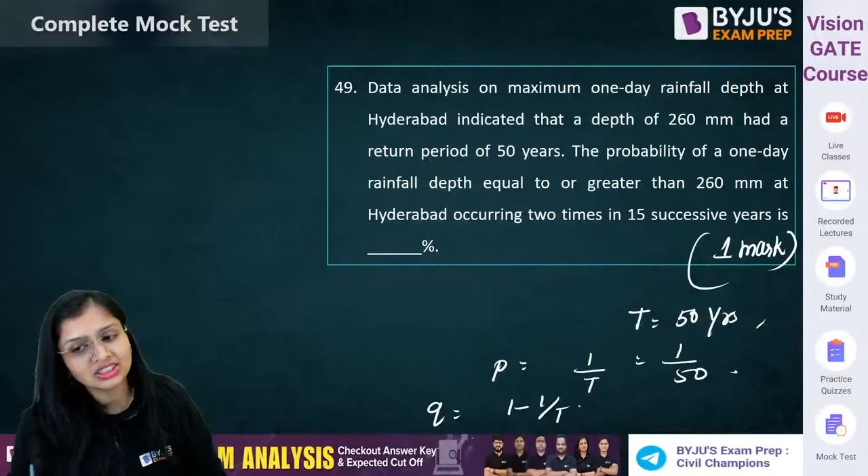The probability of one-day depth equal to 260 mm at Hyderabad occurring 2 times in 15 successive years - occurring twice in 15 years. What is the probability? Probability of occurrence is 1 by t, that is 1 by 50. Probability of non-occurrence is 1 minus 1 by 50, that is 49 by 50. How much does it say?

For occurring 2 times, you know this is probability, NCR P to the power R Q to the power N minus R. So out of 15 times occurring twice, probability of occurring 1 by 50, not occurring 49 by 50. Come on, multiply by 100 and tell me the answer in percentage, correct up to 2 decimal places.

Solve it. Multiply by 100 also, because pay attention, it's written in percentage.

6.46. Check it out again. Check it out again. Come on, Mayank, Sadhna, Anwar, Pratmesh, come on quickly. Check out again, Yukta, quick guys. Now Dheeraj sir will be coming after this.

3.22%. Anybody getting the answer from 3.18 to 3.38 can give themselves 1 mark. Clear? So this was the questions from my side. I've covered aptitude 10 questions, environment 8 questions, OCF 3, hydrology 2 and irrigation 1 question.

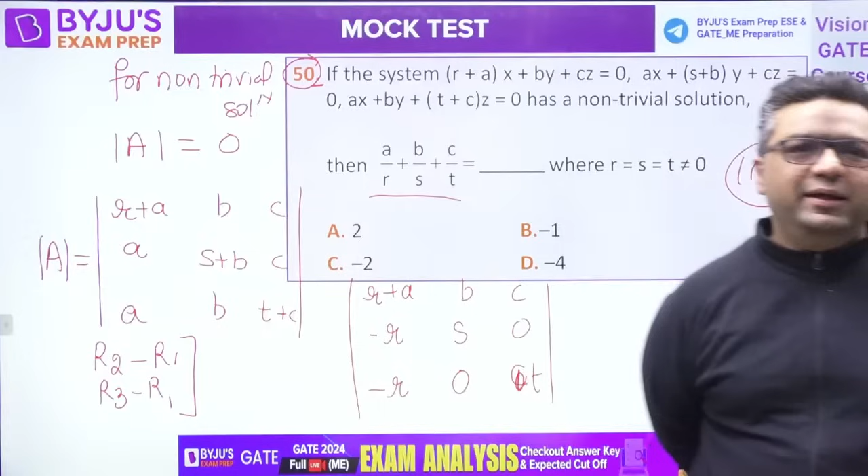Yes, anybody guys, by now you should have got the answer. Anybody? Dharmendra, Mayank, Prithvi. Okay, let's say I'm saying the answer to be minus 1, that is B. Anybody else? Vishnu is saying minus 1, that is B. Mayank, Dharmendra, Chinna, Dhana Lakshmi is also saying minus 1. Very good, guys, answer is minus 1.

So you can see first I have applied R2 minus R1, R3 minus R1. After applying this, I will directly expand this. So when I expand it, it will be R plus A into ST. Then I would be having minus B into minus RT, so that becomes plus BRT. And then plus C, that is plus RS. When you equate it to 0 and divide it by RST, you get A by R plus B by S plus C by T is equals to -1.

So answer B is correct, guys. There is no doubt about that B is the right answer. Everybody who has given the answer, they have given it correctly. But very few students have given it, so those who gave the right answer can add 1 mark.

Question number 51, this is from maxima minima. This is a 2-mark question. You need to find out the maximum value of the function. Try to solve it, guys. The question is in front of you, the function is given, they are saying x is more than 0. Find out the maximum value of fx. Try to solve it, guys. This is an MCQ only, so guys, you can try by your own, then only it is a benefit of this test.

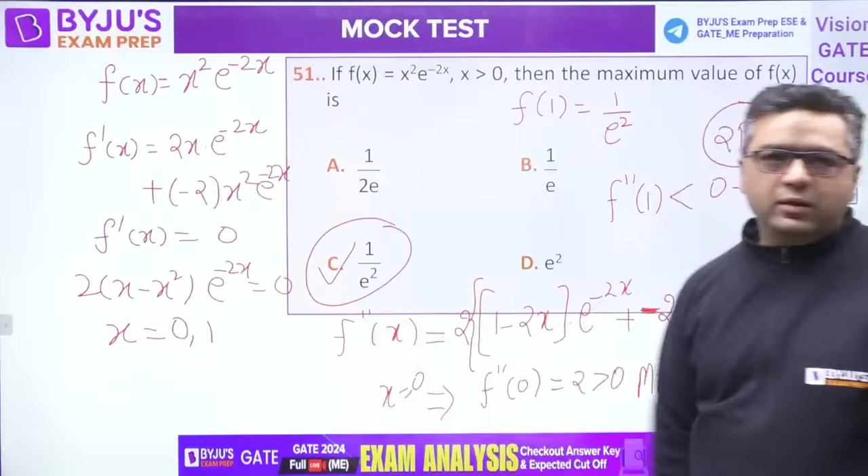So you need to find f of 1. When you find it, you get 1 by e squared. C is the right answer. Everybody, very good, Prem, very nice. C is the right answer for this question.

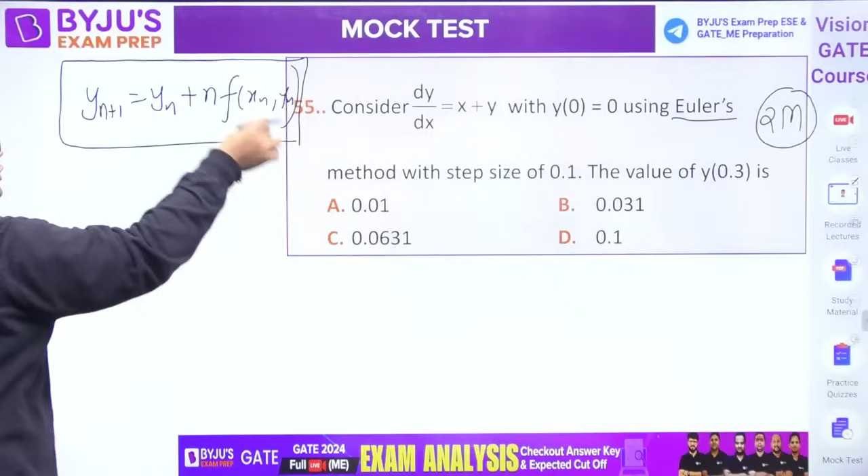2 marks question, guys. Question number 55, 2 marks question. After this, the next question is coming from Laplace. Solve this, guys, solve this, solve this. Question number 55, 2 marks.

You can see they have given you the value of y0 and they're asking you the value at 0.3. Step size is 0.1, so you need to go for 3 iterations. 3 iterations are asked, 2 marks, 3 iterations. Let us see how many of you give the right answer. Everybody would be aware that this is nothing but our f(xn, yn).

I have taught this to you in the mathematics session, if you remember. Vishnu is saying B is the answer. What about others? Vishnu said B. Lasya saying B. Okay, what about others?

Okay, Mayank is saying B. B is the right answer, guys.

When you will be finding out, first put n equals to 0. Then you get y1 equals y0, plus when n is 0, y0 is given as 0. So for h is 0.1, and putting x equals 0, y0 given, it is going to be 0 plus 0. So we get y1, this is also 0. So y1 is 0.

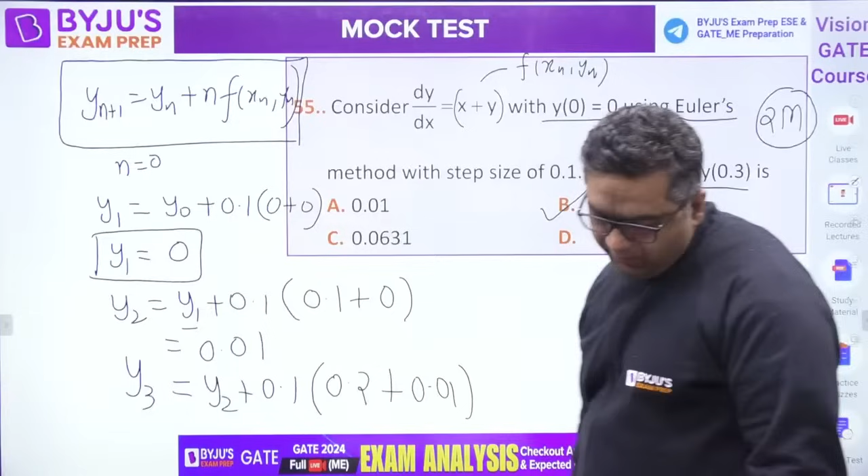It will be nothing but y2 plus 0.1 into x2, which is 0.2, plus y was 0.01. So when I solve this, it would be coming out to be 0.031.

So the answer will be coming out to be B. Everybody understood, guys? Answer will be B.

Moving to the next question, number 56. Laplace, it is a 1 mark question, guys. Solve it, guys.

1 mark question, next is also 1 mark. We are having one more question from maths. Then we are coming into engineering mechanics and part CPM, 4 questions from that, and then we will enter into the last part.

Tell me the answer, this is not that much time taking now. Laplace of e to the power minus 2t plus 5.

Kartikeya Jaiswal is saying C is the answer. Dharmendra is saying C is the answer. Yukta is saying C is the answer. Govind, yes, C is the right answer.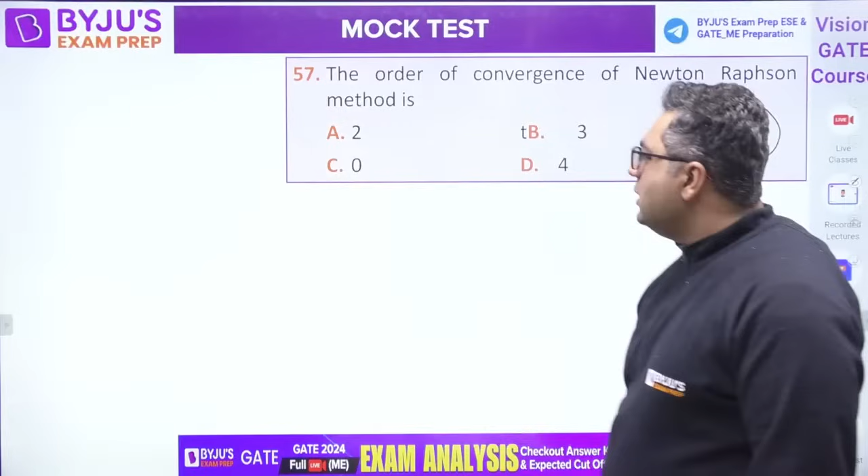Okay, so I feel those who have attended are giving the right answer. If you remember, Regula-Falsi was having order 1, Newton-Raphson was having order 2. That is why Newton-Raphson is moving fastly towards the solution, it is a better one. Newton-Raphson is having the order of convergence as 2.

Moving further, guys, now engineering mechanics question. It is from trusses. Truss question for 2 marks. It is not difficult, just you need to identify how to do this. Engineering mechanics 2 marks question, 58th number. We are having 7 more after this.

Everybody. Yes, very good, Kartikeya.

Solve it, guys, very easy question it is from the trusses. For the truss loaded as shown in the figure, force in member AC. You are asked the force in this member. Everybody.

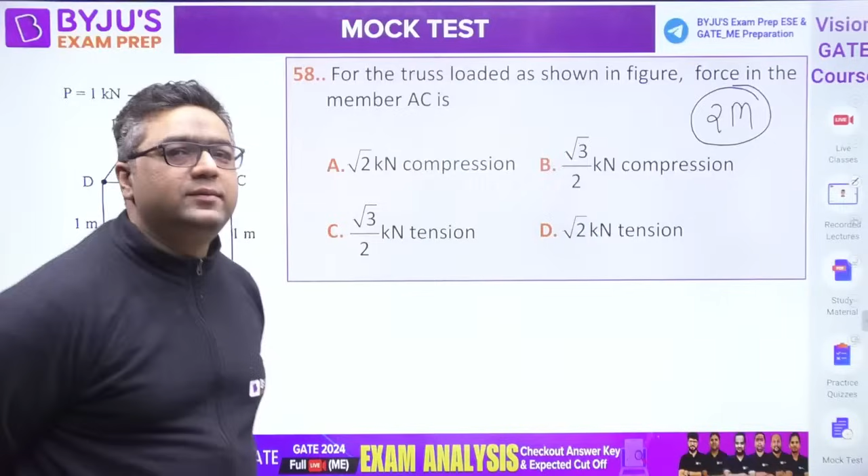Guys, whenever you are having this type of structure, method of section is going to be the better choice, because for such cases method of joint is very much time taking. Here you need to go for method of section.

Let's say I'm saying the answer to be A. What about others? Govind is also saying A. Dharmendra, Vishnu also saying A.

Let us see. First of all, let us apply the method of section here. If you apply it here, you can see this would be like this. If you see these members, here we are having a force of 1 kilonewton horizontal. In this member, force will be vertical. In this member, force will be vertical. Here the force will be like this, I am assuming some direction.

So obviously its horizontal component will be balancing this. So I can say FAC, this angle is 45 because 1,1,1 everything is given. So FAC cos 45 is coming out to be 1. So FAC will be coming out to be root 2. So the answer is root 2 kilonewtons, but it can be in tension, it can be in compression.

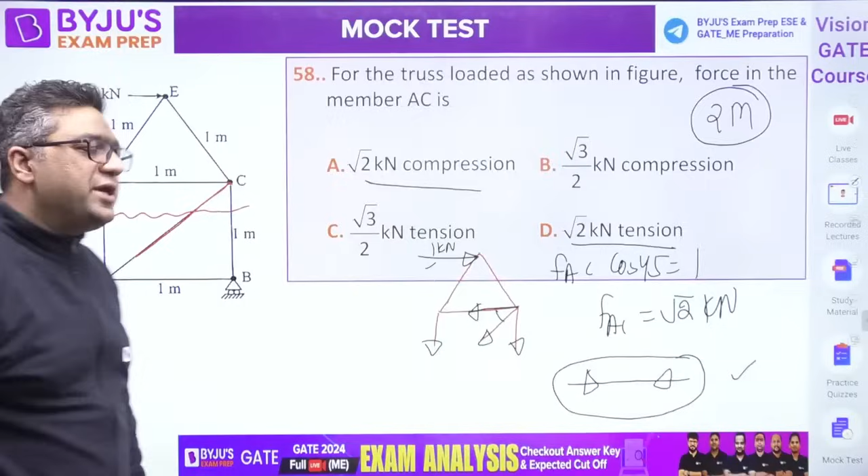If you see this member, the force is coming in this way. Can you tell me, is this in tension or compression? D would be the right answer. The internal resistance is coming like this, when I am extended. So tension or compression - is it towards the joint or away from the joint? It is away from the joint. It is root 2 kilonewton away from the joint.

Everybody knows that whenever a spring is in tension, you are applying tension onto that, the internal resistance will be like this. Tension would be the answer. D is the right answer.

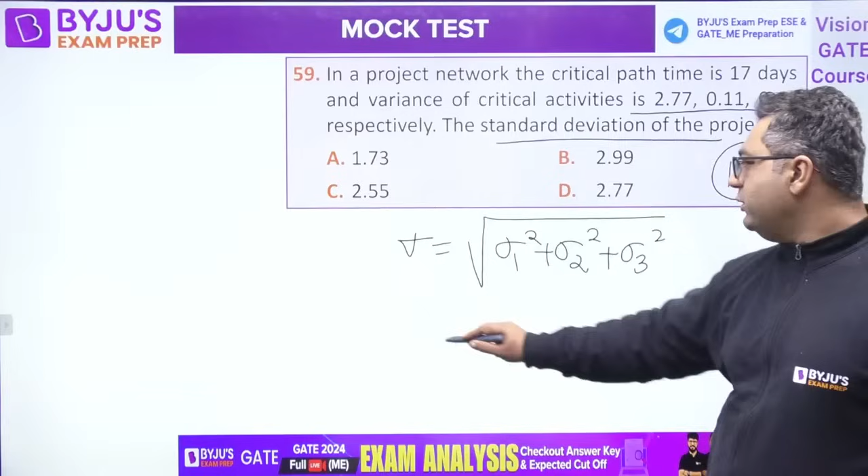59. You will be getting A will be the right answer for this. Mukul, I feel you have done some mistake. Already sigma 1 square is given. Already variance is given: 2.77 plus 0.11 plus 0.11. You need not to square it. Already it is given like critical activities, variance is given. Sigma 1 square is given, sigma 2 square is given, sigma 3 square is given. Answer will be A.

No Kartikeya, maths is not finished because it is a complete paper going on - 13 marks maths is coming. That we have done already. Answer will be A for this. Everybody understood? Mayank, okay very good. Vishnu, you got it? Vishnu, Mukul, got it or not? Please tell me that. Yes.

Moving to question number 60. Once again, engineering mechanics, 1 mark question. Question 60, engineering mechanics. You need to find out the tension in the string. Pulley is frictionless. 1 mark question, question number 60.

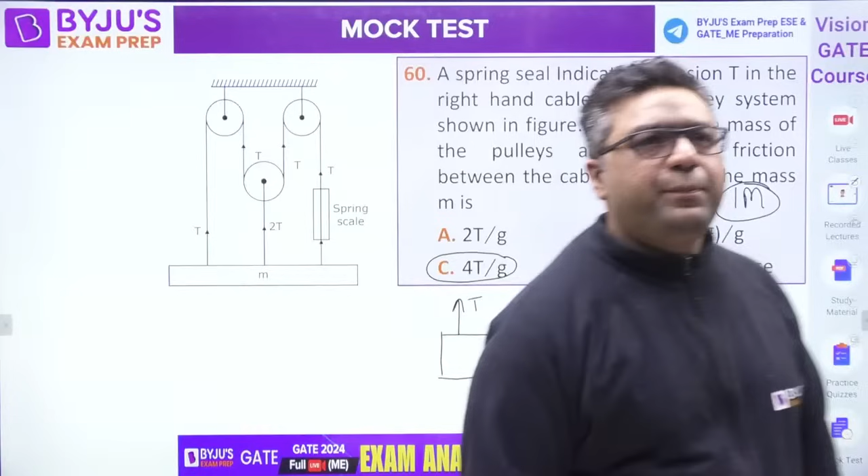Everybody understood this? Last question from PERT CPM, then 4 questions from fluid mechanics. Question number 61, this is for 2 marks, critical path. They have given you activities and durations - critical path, 2 marks question. After that, 4 questions from fluid mechanics.

Solve it guys, I'm going fast because only 1 day is left for the exam. So I'm going like students are also in hurry that they need to finish quickly. Critical path - activities are given, durations are given. Try to solve it, guys, try to solve it.

Abhay is saying the answer to be B. What about others? Abhay said answer is B. Yes, Mukul. Yes, Dinesh, Yukta, Mayank. Only Abhay have given the answer.

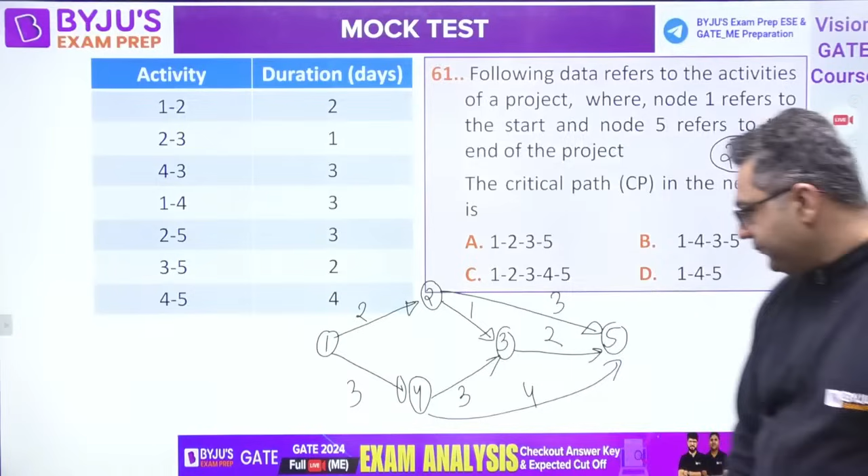If you see the critical path: when you go for 1, 2, 3, 5 it is 2, 1, 2, 5 days. For 1, 4, 3, 5 it is 3, 3, 6 and 2, giving 8 days. For 1, 2, 3, 4, 5, 2, 3, 4 we cannot go - incorrect path. 1, 4, 5 is also an incorrect path. So B is the right answer, 8 days will be the answer.

So guys, now I am going with the fluid mechanics question. As you know, I am not right now a fluid mechanics teacher for you, so I will show you the question. You can answer me, I will give you the right answer, but for the solution you can consult the fluid mechanics faculty.

Moving to question number 62. You need to find out which of the following equation is correct. This is from fluid kinematics. For your marks, I am standing here. It is a 1 mark question.

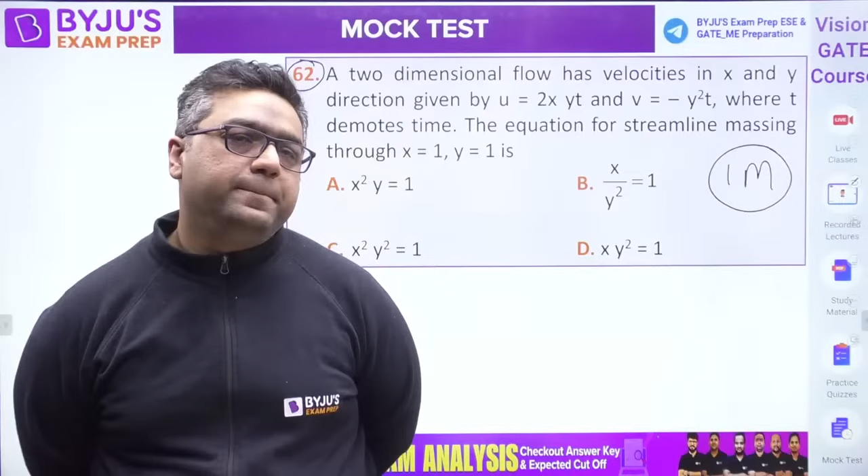No, they are different. This is x square y, this is x y square. They are different - one is x square y, the other is x y square. They are different. Okay, D is the right answer. D is the right answer.

Okay, moving to the next question, guys. Moving to the next question, number 63.

The velocity field in a fluid is given. Which of the following statements are correct? This is MSQ - more than one option can be correct. Weightage is 2 marks for this. 2 marks MSQ, 2 more questions after this, guys. Yes, very good, Mukul. MSQ, guys, more than one option can be correct. 2 marks.

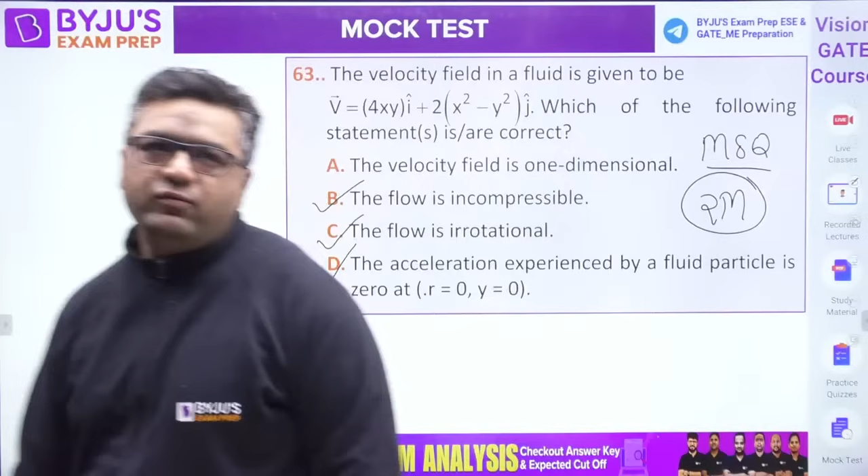Okay, so guys, this is MSQ. Mukul has given the right answer - B is correct, C is correct, D is correct. Okay, B, C and D are the right answer for this. Fine, B, C and D are the right answer.

Moving further guys, second last question in front of you. This is for 1 mark. Very good Abhay, but there were 3 options correct - that was an MSQ.

Okay, here the question is incomplete, let me complete it. Don't worry, just give me a minute. I have the questions with me, sometimes typing errors happen, guys, sorry for that. Just give me a minute, I'm correcting it.

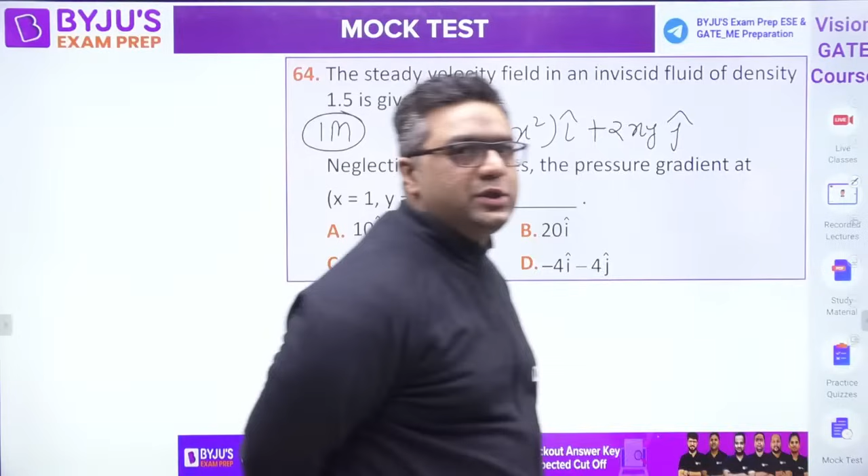Now the question is in front of you guys, a 1 mark question, simple it is. Thanks Kartikeya. What would be the answer guys? This is MCQ, 1 option is correct. Second last question.

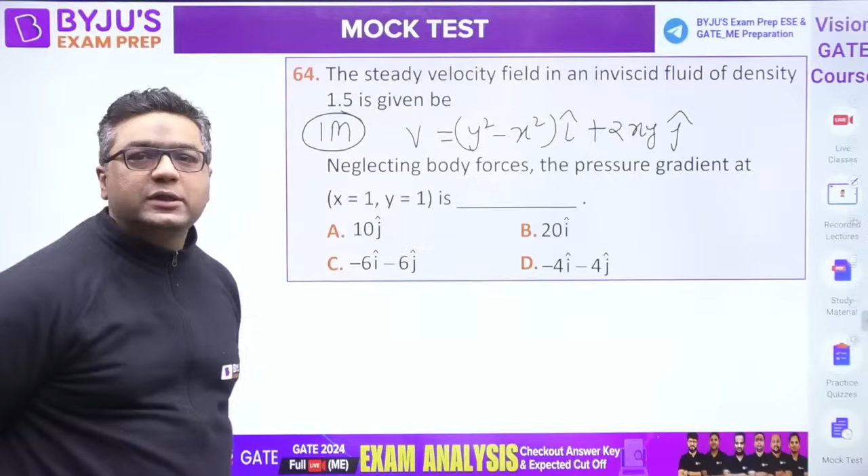Yukta is saying D is the answer. Okay, what about others? If you find any difficulty in the FM question, you can ask the FM faculty, don't worry, they will answer you regarding that. Mukul is saying C, Mayank is saying D. The answer will be C here, C is the right answer. Okay, it would be minus 6 i cap minus 6 j cap. C is the right answer.

The last question guys in front of you, number 65, 2 marks, numerical answer type question. Okay, this is numerical answer type. Last question from my side, last question.